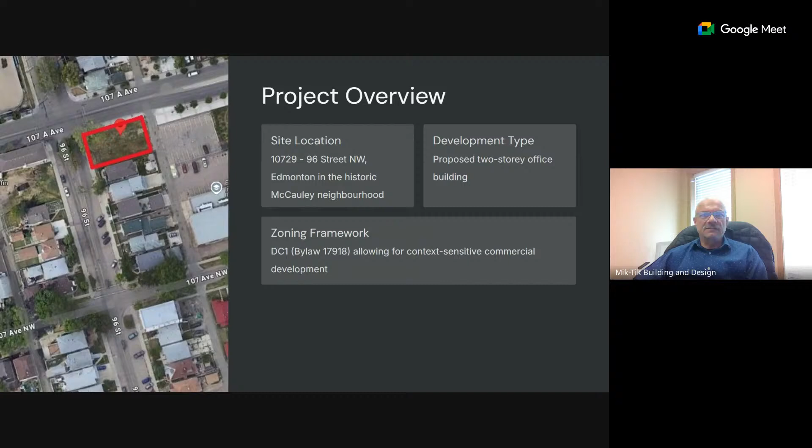The proposal is closely aligned with the direction set out in both the Central District Plan and the Edmonton City Plan, which together guide growth in a way that is compact, connected, and climate resilient. From a policy perspective, this proposal supports several key goals. Firstly, it supports strategic infill along established corridors.

The site is located within a designated growth area that encourages the reuse of underutilized parcels in established neighborhoods. Like we saw previously, the site is currently vacant, and this development aligns with this vision in the city plan. It also advances the 15 minute community concept by introducing employment opportunities close to where people live, reducing reliance on vehicles and enabling a more walkable urban lifestyle.

In addition, it supports efficient use of existing infrastructure, including roads, the transit network, and utilities, which reduces environmental footprint and long-term servicing cost for the city. By delivering a modestly scaled, street-oriented office building, this proposal helps reinforce the character and vibrancy of the McCauley neighborhood while supporting Edmonton's broader goals for sustainable urban growth. Next slide, please.

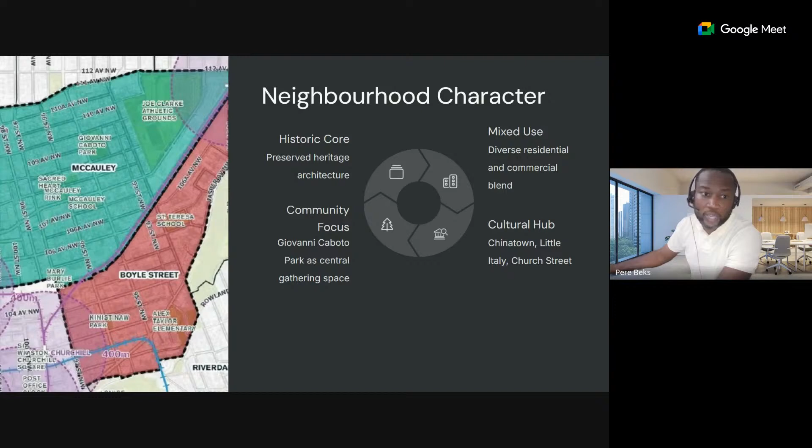The site is well situated within Edmonton's multimodal transportation network. It is within walking distance from the Stadium LRT station and is served by several bus routes. The site connects directly to pedestrian priority corridors and existing bike routes identified in the bike plan and the Central District Plan. Vehicular access has been located at the rear of the site to minimize conflict along the public street edge. On-site bicycle parking has been incorporated to support active transportation and enhance the site's functionality.

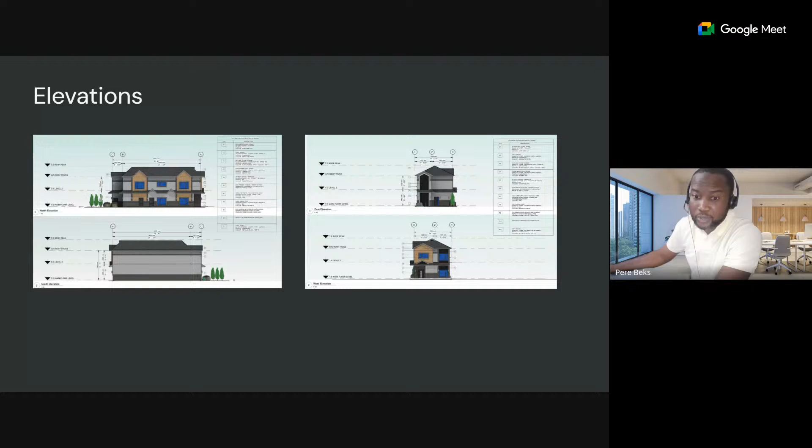Lighting has been designed following CPTED principles, with energy-efficient wall-mounted fixtures placed strategically to improve visibility and safety while minimizing light spill onto adjacent properties. Vehicular access, loading, and garbage collection have been located at the rear of the site to maintain a strong pedestrian focus along the public frontages.

The architecture balances a contemporary expression with contextual sensitivity, using materials, scale, and detailing that complement the McCauley neighborhood while delivering a functional and adaptable commercial building.

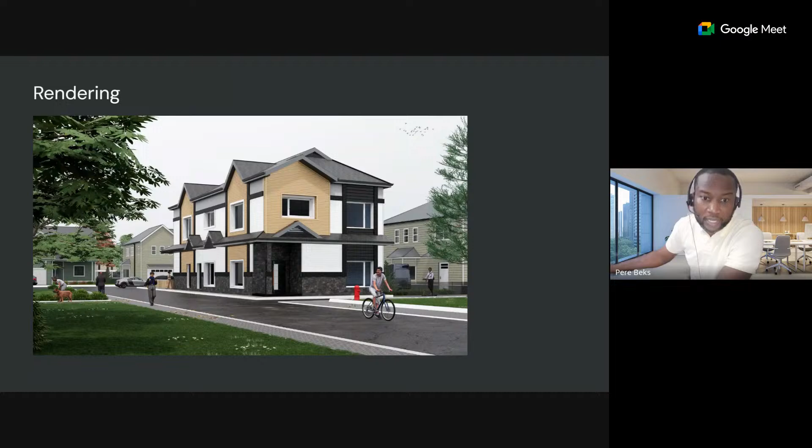The material palette for the building has been carefully selected to balance durability and visual interest, ensuring that the building integrates well within the McCauley neighborhood while maintaining a contemporary expression. The north elevation facing 107A Avenue features a combination of veneer stone and horizontal siding, materials chosen for their texture, warmth, and durability. In addition to providing visual interest, the elevation also includes pedestrian access into the building, helping to activate this portion of 107A Avenue and contributing to the walkability and vibrancy of the site's frontage along these streets.

The west elevation, fronting directly onto 96th Street, will serve as the building's main entrance. This facade has been designed with a higher level of articulation and material variation to create a welcoming pedestrian-friendly entrance. Window placement, framed openings, and facade detailing help to reinforce visual interest and animate the public realm. The overall architectural approach focuses on simple, clean lines with a restrained but thoughtful material palette that is durable, low maintenance, and appropriate for Edmonton's climate and McCauley's heritage context.

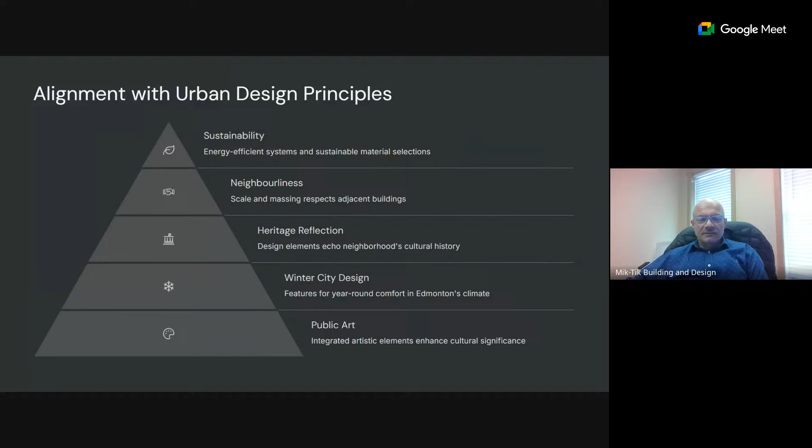Sure, thank you for the presentation. My first observation of the proposal is that the building feels very residential by design rather than expressing its commercial or office uses. Examples include the choices for windows, glazing, and doorways. I'm wondering whether the team explored other options for architectural detailing, like glazing and doorways, to make it feel more like a commercial building on the corner of these two streets rather than blending in and feeling like a residential building.

Thank you for that question. I can respond directly and say that the design choices we made were very intentional. The DC zoning in place speaks to maintaining the heritage character, so that was a big design philosophy for us. Rather than slap a modern contemporary office building, we wanted to align with the DC regulations that spoke to the heritage character of the neighborhood. So I completely get what you're saying, but our hands were kind of tied by the regulations in the DC.

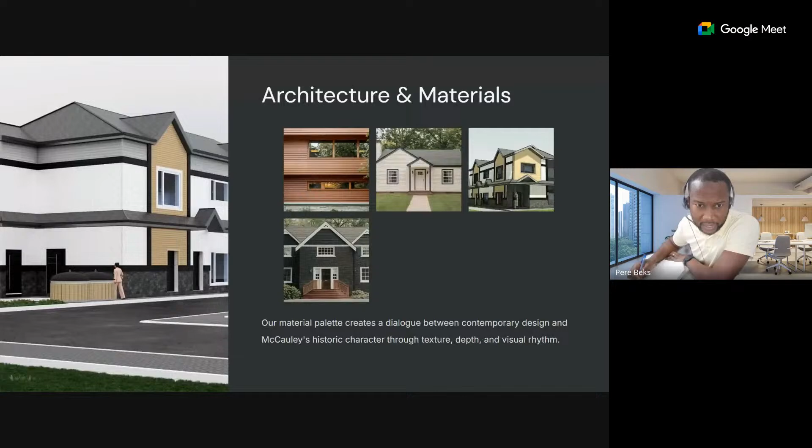Thank you so much. So, while the Moloks—first of all, thank you for that question—we have used Moloks, and Moloks are aesthetically appealing and don't give a sense of a nasty garbage enclosure. Part of the design considerations was that we tried to do it the other way, but with truck turning movement for garbage collection, at the DP stage we had to do a swept path showing the truck turning movement, and the Molok solution was the only one that worked. I recognize the point that it is fronting onto 107A, but the Molok system has been widely used throughout Edmonton. It's widely accepted, visually appealing, and doesn't come off as a visual nuisance, if you get what I mean. I hope I was able to answer that question.

Yeah, it just seems like you could get a lot more street frontage, but I guess there's other considerations you need to work with and mitigate. So yeah, that's really about it for me. Thank you, thank you, Karen.

Greg? Hi, thank you for your presentation. Always good to see a vacant lot get filled. I have a few comments.

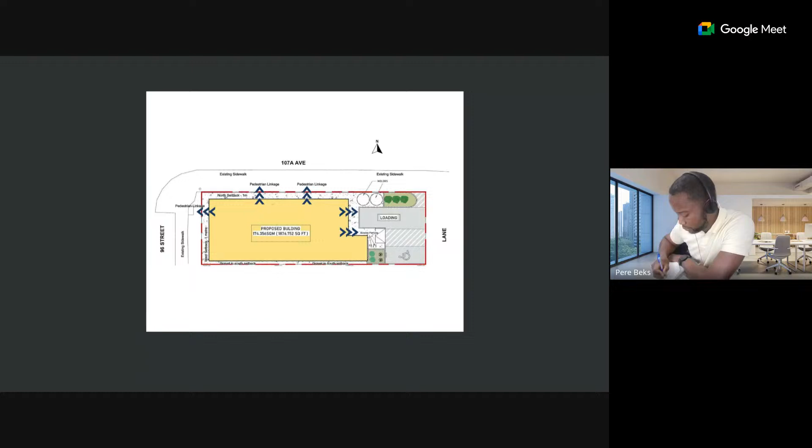You raised very valid comments. Going back to the conversations we had with the development officers and city administration during the DP process, Building Great Neighborhoods is coming into the area. On the western front, while we have limited setbacks, we were explicitly instructed to have a concrete hard surfacing area. Due to the work Building Great Neighborhoods is doing, we were instructed to have hard surfacing on the north side as well. Considering the size of the site, we were really constrained, and on a small site like this, there is so much limitation to bringing in urban design elements we'd love to see.

If this was a much larger site, I absolutely agree with you, we could push and pull and play with several design elements. But due to the small size of the site, our hands were tied. It was very constrained, and that's where I would leave it. Thank you.

Is that it, Jonathan? Yeah, I mean, I get that comment.

I'm just curious if you had a response on, because of all your roof pitches, how you're dealing with storm drainage, considering there aren't any downspouts.

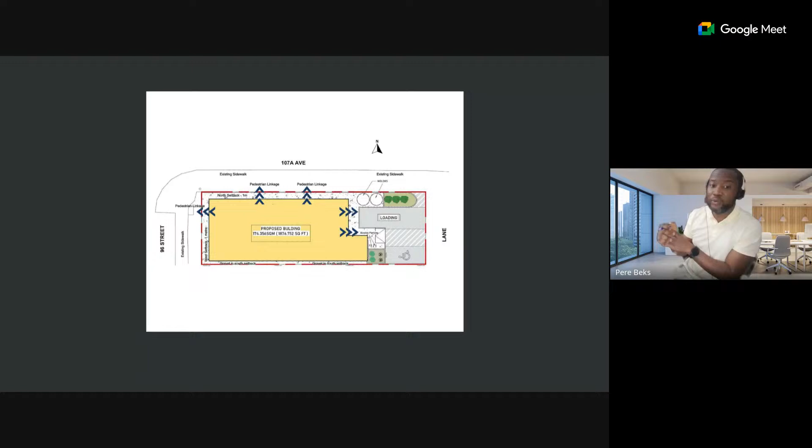To touch back on the DC regulations, the DC regulation specifically called for this type of roof and sets a certain parameter for the roof pitch. So even if we wanted to go with a flat roof, modern commercial styled concept that everyone has been referring to, I want to state categorically that we will be unable to do that because our hands are tied by the regulations in the direct control zone.

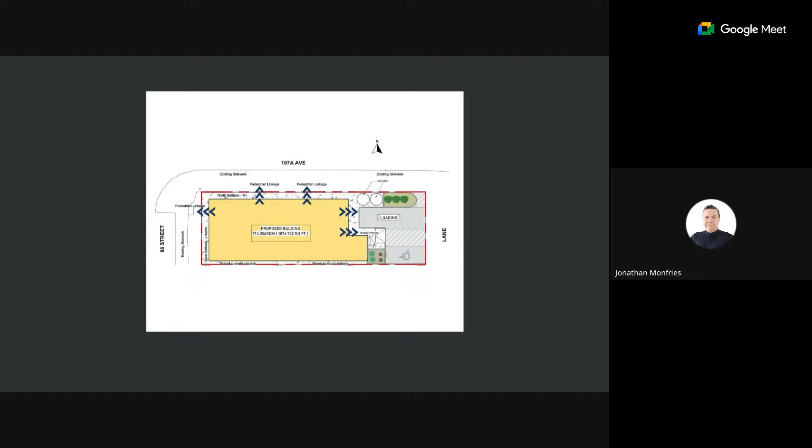Okay, thank you. Thank you, Jonathan. Neil?

Thank you, and thank you for your presentation. I gotta say, you're saying all the right things, but I'm looking at this project and I don't see it. Even if your hands are tied by the DC referring to the McCauley area, this doesn't fit that even as a residential building.

And as an office building, it absolutely needs more interface with the street, particularly since you're filling the site so much. So I'm not going to add anything more than what my colleagues have said, but I think this really would have benefited from an informal, and I think we could have given you a little more support to make your case to the development officer to get a little more leniency within the DC, if you felt that's what was constraining you.

I don't think that it is. I think you could absolutely do this differently, but I would highly recommend an informal for this type of project on a street as significant as 96. Thank you so much, I'll pass it along.

Thank you, Neil. To you, David. Yeah, thanks for your presentation.

I would agree with the other members of the committee with regards to the visual aspects of the building being much more residential looking than commercial. I also agree

with Karen's comments about the location of the Moloks, because yes, they're very appealing once they first go in, but over time they do deteriorate, and it's hard to maintain all the garbage in those Moloks. So typically there's a lot of mess and garbage that ends up spilling all around those things.

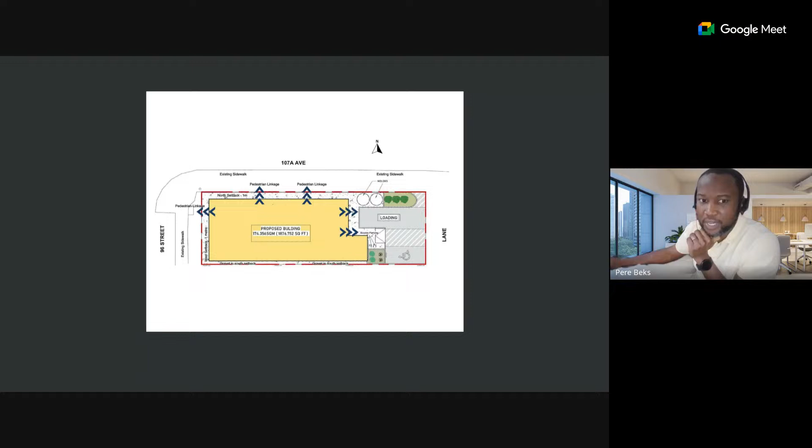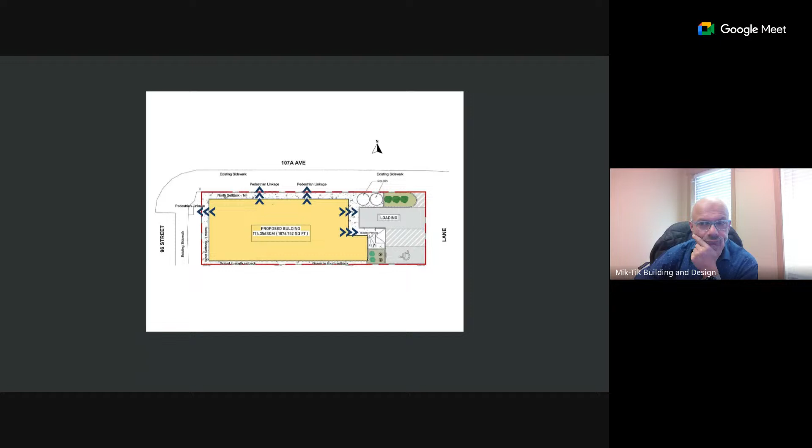Like we have on the screen right now, we are providing those pedestrian linkages to create that connection, to activate that corner of 107A. While this is not the highest and the best and the greatest, I believe it is something that is functional, something that works. If this was a larger site, we would happily throw in design elements that would meet the criteria you were looking for. Just to reiterate, this is a small site. I don't want to repeat myself and talk about all the constraints in the DC, but we were severely constrained by the direct control zone.

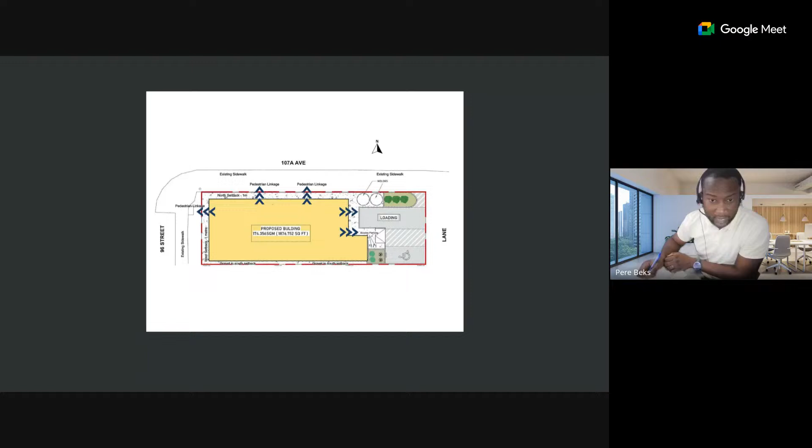Ask me the question, is it functional? I would say yes. Does it activate 107A? To some degree, I would say yes. I think that's my response to your question.

Thank you. Okay. Well, I do find, providing that type of statement, and what's being presented in plan and in your perspectives, I would suggest that it's something that could be looked at a little bit further and further enhanced.

The other question I had was with regards to the graphics. Is the main floor actually flush with the surrounding sidewalks? Because in everything I've seen, I see a step up to the main floor. No, it's flush. It's flush.

Okay, thanks. And then the hard surface connection to 96th Street, I like, this is actually, having this site plan is really good. When I look, there seems to be a lot of existing streetscape infrastructure - there's an existing elm tree, a power box, traffic light posts. Given all of that clutter that's there, and it's not really shown on your site plan, I'm just wondering, since that's the main entrance proposed into the building, if it might not be better to make that main entrance off 107A Avenue, because I'm not too sure how you're navigating around all of the stuff that exists on that corner.

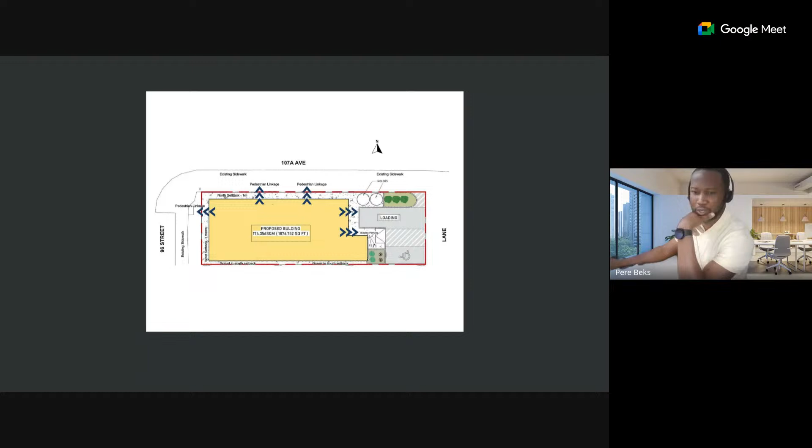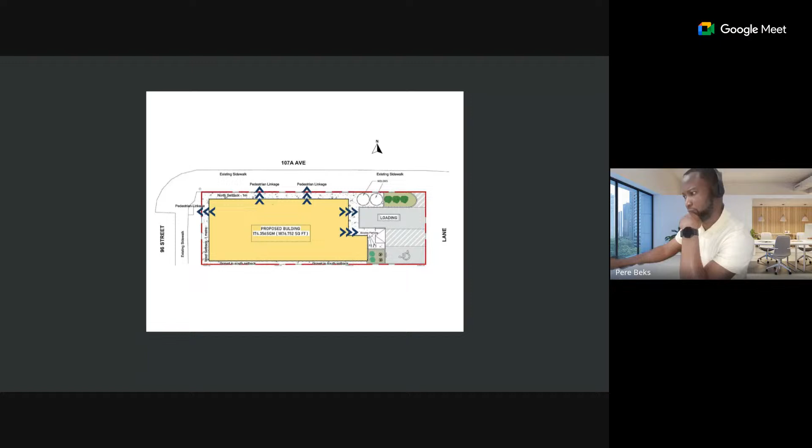Thanks for that question. The existing tree on the site will be removed. That's on city property though, right? That is on private property. Yes, it's on the property. It's on private property. Okay. Yes. Okay, thanks, that's all my questions.

Thank you, David. That leaves me. I don't know if I have too much more to say than what everyone has mentioned. I will briefly mention the Moloks' position again, and while I understand the swept path analysis was probably the limiting factor, the one thing I want to talk about is the position of the accessible parking lot, and thinking about the path of that person coming up and around all the way to the front of the building on 96th or on 107th. I think that's another unfortunate instance of that whole backside of the building being flipped. To me, it just feels flipped the wrong way. But that's about it on that.

The other thing, I do understand what you said about the residential aspect versus the commercial aspect. I think there are still ways you can engage, especially on 107th. If I'm thinking more of a Main Street condition, generally we want to see a lot more glazing. Those skirt roofs - one of them aligns to an entrance, one of them does not - so it seems a little haphazard in the way the detailing has occurred. I think there are opportunities, while keeping a pitched roof and a residential character, for that ground floor to be much more inviting and open, having eyes on the street.

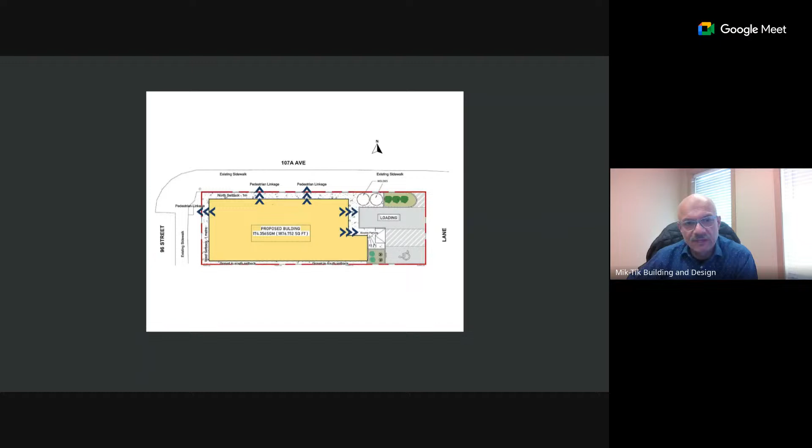Yeah, just want to mention, to the point you mentioned about barrier-free accessibility, where the parking spot is in the back - we still have that access from the rear door. So that door is accessible for barrier-free. It's accessible from the parking spot from the back. You can go through the main floor easily, whenever you get to the small ramp to the sidewalk, then you are flush with the main floor, and there is access from the back to the main floor store area or whatever the business area. Okay, thank you. Yeah, I must have overlooked that. Just didn't see it on the site plan in front of me. But yeah.

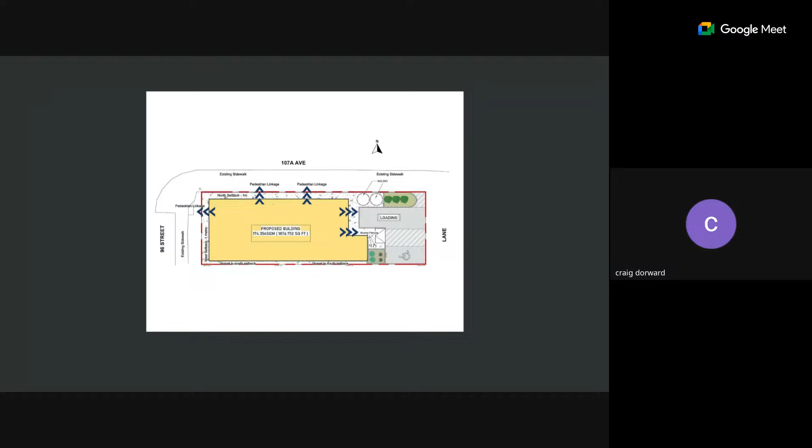Are we moving towards a motion? I'll make a motion of non-support. I'll second.

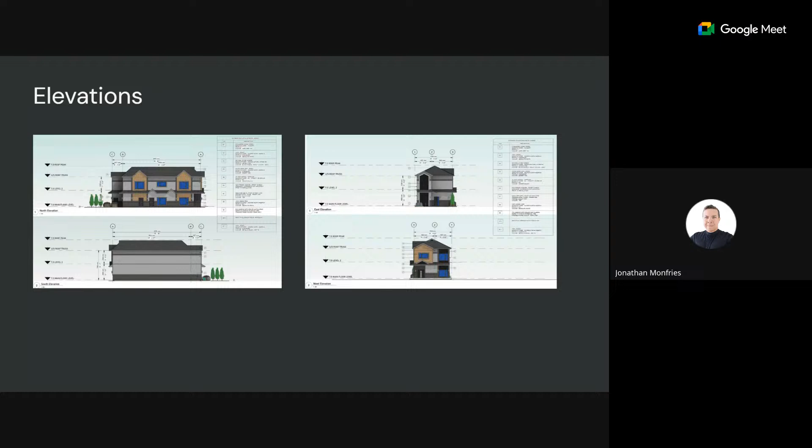We're working on the letter, sorry, just having a little technical glitch here. I feel like, I mean, even the kind of ledge stone, rundle stone, whatever kind of veneer that they're using, I think the character of this neighborhood would prefer brick, but I don't know how much into detail we want to get.

You want me to project it? Yeah, sorry, that's all right, all good. Here we go, all right, we're back, sorry.

Yeah, something like that. The neighborhood kind of sneaking in brick, I can't remember who said that, about the context being the immediate context and not the larger context of the neighborhood. I thought that was a good point. Yeah, that was me, Craig.

It seems like they adopted the exterior aesthetic of the residential street to the south, as opposed to widening out the aesthetic range. Like when you go to some of the adjacent streets, a lot of brick seems to be more common than stone. The stone is in the residential neighborhood.